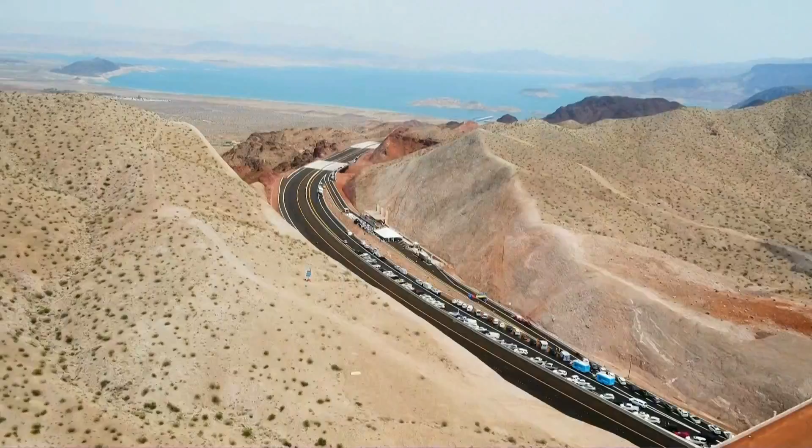This concludes the General Manager's report. Comments or questions for Dr. Fred?

Commissioner? We can't let him off the spot. I know, we got him here. That was an awesome opening. I've never really been to one like that, other than the bridge, how many years back. So I want to just thank the staff for what you put together.

I also think it's time to publicly note that unfortunately we had a couple of accidents right after the opening, but it had nothing to do with the design. I think that's important to put on the record. Do you mind doing something like that?

Sure. There were a couple of accidents, nothing to do with the project itself. One was attributed to a drunk driver. The other was somebody who just decided to do a U-turn. We don't know the cause of that, but nothing to do with the design. We've been addressing this with the media, and we'll continue to monitor the facility in case we need to do something else.

All right, item 4 is to receive NDOT's Director's Report. Mr. Rudy Malfabon has this item. Thank you, Fred.

Wanted to mention related to the I-11, a great event, and I was really pleased to participate in and attend. But we are working with the RTC and Boulder City on some revisions to the signage there. We've received comments, and you probably have too, about people not being aware. It's a brand new highway, so they're not familiar with it, but it will improve some of the signage for if you're leaving Vegas and going to Kingman, a larger sign there that denotes Kingman, but also for Boulder City. Historic Boulder City will be denoted, and the access to the dam for the visitor center down there. So we'll make those signing improvements with RTC, and hopefully people will have clearer direction on some of the exits.

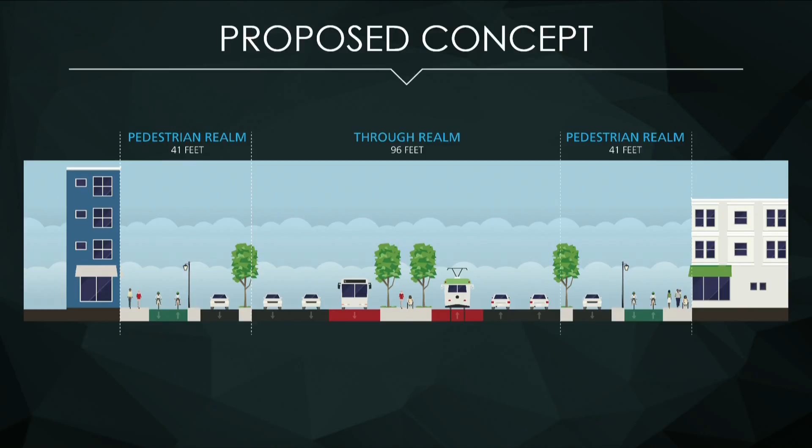So what we did is come up with this segment design. We have a pedestrian realm that's going to be used for pedestrians, bikes, and slow-moving traffic. Through the through realm, we have a corridor that can accommodate any high-capacity transit, which could be BRT, light rail, or a streetcar, along with fast-moving vehicles.

In future, it's going to be quite cool. This is how it's going to look. What you see here is two-way bike lanes. We have reduced the pedestrian crossing distances, enhancing safety. And we have accommodated open space that can be used for parks, linear parks. That was something the community also would like to see.

Like I said earlier, none of this was possible without extensive stakeholder and community engagement. And so I would like Jacob Snow to talk about our efforts on that aspect.

Good morning, Mr. Chairman, members of the Commission. For the record, Jacob Snow with the J. Barrett Company, a subconsultant to Atkins on this project. What you're seeing in the background is the RTC's community engagement bus, or the onboard bus. Most of you have actually been on board that vehicle. It's a converted 40-foot transit bus that inside has a kids' play area and iPads where people can come on and take a survey.

The RTC utilized that bus very effectively up and down this corridor for dozens of community engagement events at senior centers, community centers, recreation centers, employment fairs, and actual bus stops. We got actual boots on the ground out with people who live and work in this corridor. We obtained more than 1,700 surveys from people who weighed in on what they thought Boulder Highway should look like and what the priorities for the design should be.

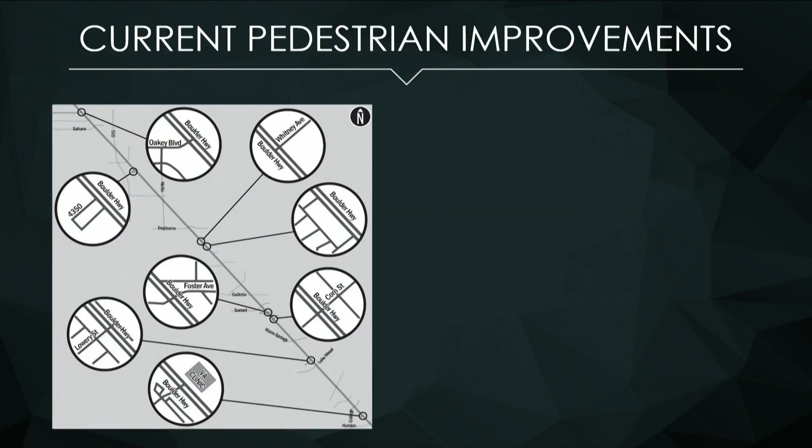Before we wrap up, while this corridor study has been underway, we want to acknowledge and draw attention to a set of 8 pedestrian safety projects that Nevada DOT has already initiated along Boulder Highway. They're our partner in this study and have been active throughout the process. These projects include a variety of safety countermeasures at some priority locations along the corridor.

So, with that final note, that concludes the update, and we're ready to respond to any questions you may have. Comments or questions from the board?

Mayor: Just very briefly, thank you. This has been such a long time coming. It was the main highway for us all back in the 60s, so we know nothing's been done and it's so necessary. I know this is a ridiculous question, but I have two of them.

The first one's not so ridiculous. Have you been able to prioritize the segments, starting in the south, the southernmost, all the way up to Charleston or wherever the last segment is? Have you prioritized this at all? That's one. And in this day and age, a projection on what it costs for each segment, so at least we can get our arms around the magnitude of what we're going to have to bond and or raise.

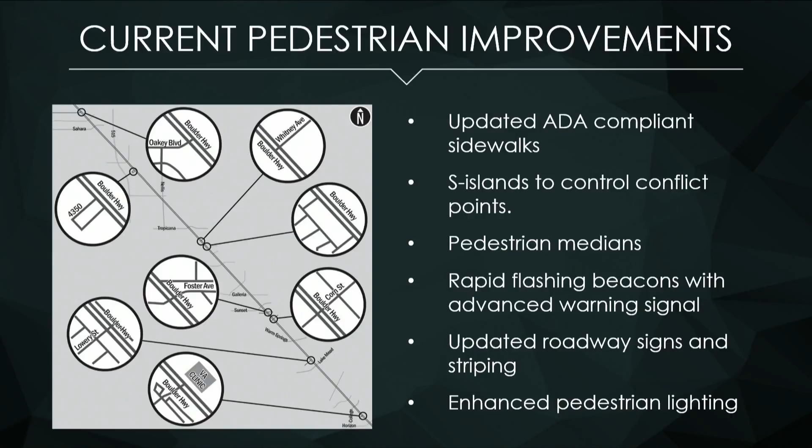With a timeline, do we have an estimate so that the public can know when it's going to start and hopefully be done by? Those are under construction. That contract's been awarded a couple months ago, so I think they're probably through mobilizing, and I could get you the timeline, but it should be probably within a year that they'll be completed.

Excellent, thank you. To follow up on the mayor, is that one project contract for all of them? Correct. That's one contract that's been awarded for those 8 intersections.

Commissioner? Thank you for asking that, it's very much needed. Sun Valley was completed, so that's not even on here as far as one of your identified areas, and that's in Commissioner Gibson's area.

So I think with your presentation, this incorporates those, so they're not exclusive of each other, right? So we're not redoing something down the road. I think that's very key for people to understand, that we're not putting something in and tearing it back out and then putting it back in again in a completely different way.

It anticipated this. Portions of this is my district, portions are Gibson's, so it's a marriage between the city of Las Vegas all the way up to Henderson. I travel that road daily, and it's always been a pedestrian issue for people. It's such a wide area to get across, and even though I have more apartments, more kids, I also have a lot of senior citizens, and we just opened Boulder Pines with the Boys and Girls Club and Mater Academy.

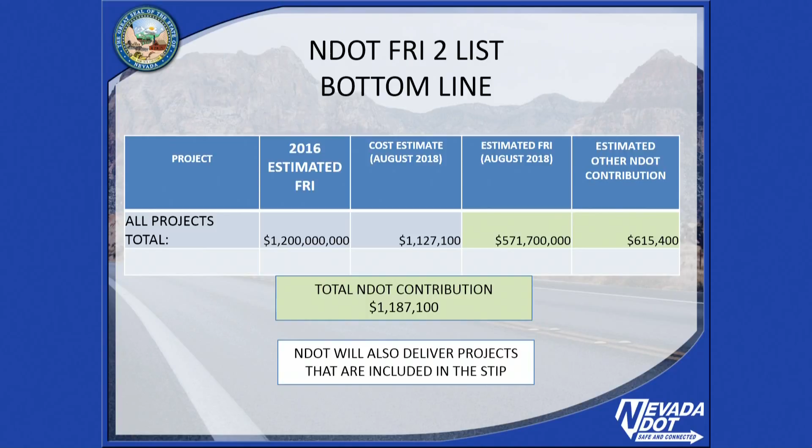Thank you, Rudy. Mayor? Actually, this is for you, Mr. Chairman.

FRI money, those vehicles that are not going to be using fuel - I think this committee or commission or somebody, some group somewhere, needs to get to the legislature, and since you're the boss, I'm asking you to make sure that something is done in this legislature to have those non-fueled vehicles participate in FRI funding. Buses, trucks, cars, everything. I don't know how to go about that and where it should be, but you've been in service a lot longer, even though you're younger. So you're charged with it, please.

Duly noted. I don't know if this was discussed in Carson City two years ago, but it certainly has been discussed with TRAC and some other issues. Do we have any update on that? That's correct. In the last legislative session, there was a discussion to impose a fee on vehicle registration or a separate fee for electric vehicles, but that didn't go through. So it's possible that will be pursued this session. But yes, duly noted, we'll make sure we work with whoever we can to move that forward this session.

Excuse me, Mr. Chairman, really, it can't just be a discussion because this legislature, unlike other states, does not meet every year.

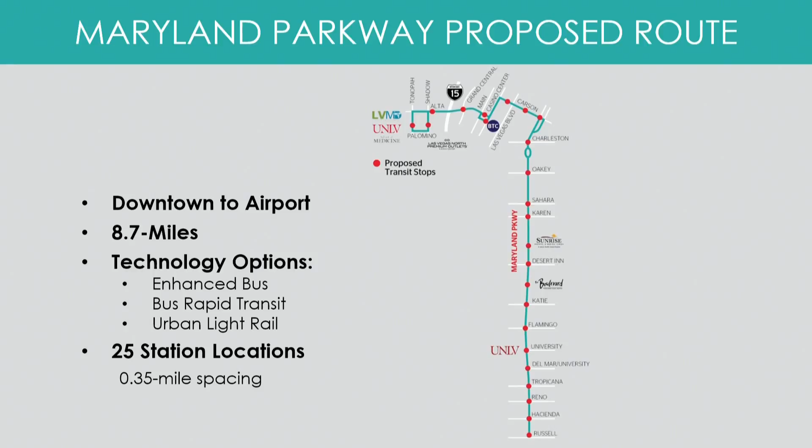So the options being considered: we call it enhanced bus, or in this case Route 109, which is our current bus route's name for Maryland Parkway, bus rapid transit, and urban light rail. I'll just highlight for you what these represent.

When we talk about enhanced bus, we're looking at reducing the number of stops, spacing them a little further apart, similar to what we've done on other corridors, and we've seen success with that on Sahara Avenue, Flamingo Road, and Boulder Highway. Counterintuitively, you'd think taking out stops would reduce ridership, but it actually increases ridership because the service is a little faster.

We were looking to do the same thing on Maryland Parkway, also upgrading the passenger shelters. This is a depiction of one that we used on Flamingo Road; we would look to do a similar upgrade with the enhanced bus option. The point of the enhanced bus is to really optimize as much as possible the current bus service we have, but with minimal capital investment going forward.

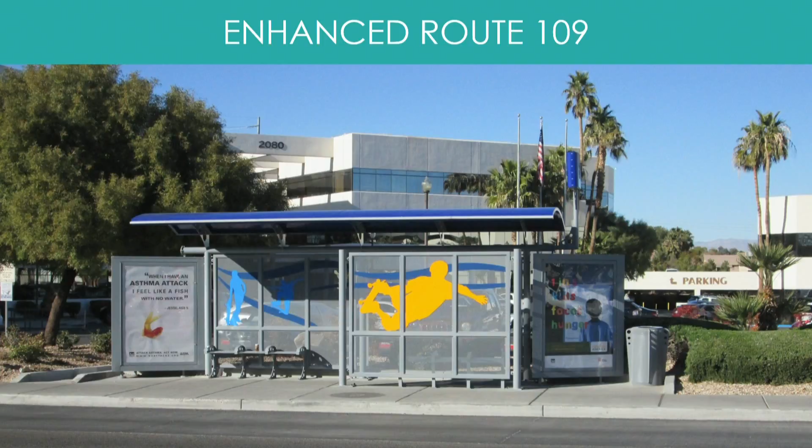The second option being considered is what we call bus rapid transit, similar to what we've done on Boulder Highway and Sahara Avenue. We're proposing to reconstruct Maryland Parkway from the 6 general purpose traffic lanes that are there today to 4 general purpose traffic lanes, plus 2 curbside running dedicated transit lanes.

These transit lanes are still available for motorists to make right turns, thereby preserving the traffic capacity that exists today. At major intersections, we may add right turn lanes to help keep the service going and maintain the capacity of the corridor.

Another feature I'd like to point out is pulling bicycles out of the roadway and creating separated bicycle lanes behind the curbs, adjacent to the sidewalk at the same elevation, giving bicyclists an area that they perceive might be safer and more comfortable to ride on. This also helps create more of a buffer between people walking on the sidewalk and where cars and buses are traveling in the roadway.

This would require slivers of right-of-way. The current right-of-way is about 100 feet nominally along the corridor. What's shown here would require somewhere around 102 to 104 feet, so just slivers along the corridor, except where we have stops, where we'd need a larger envelope to move the passenger shelters a little further away from the curb, helping customers feel more comfortable while waiting.

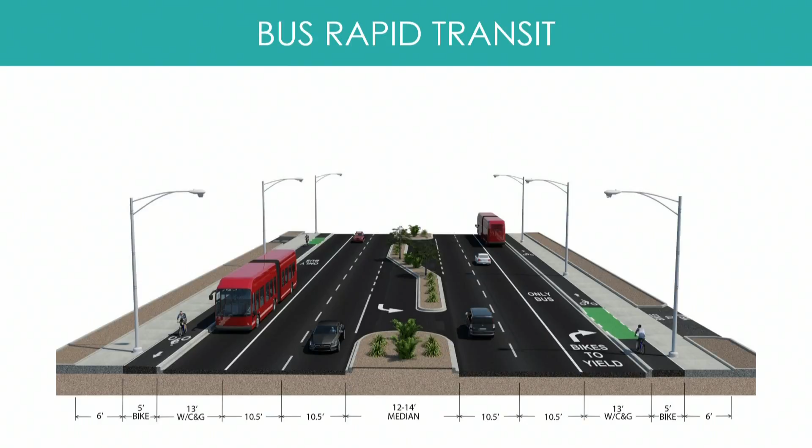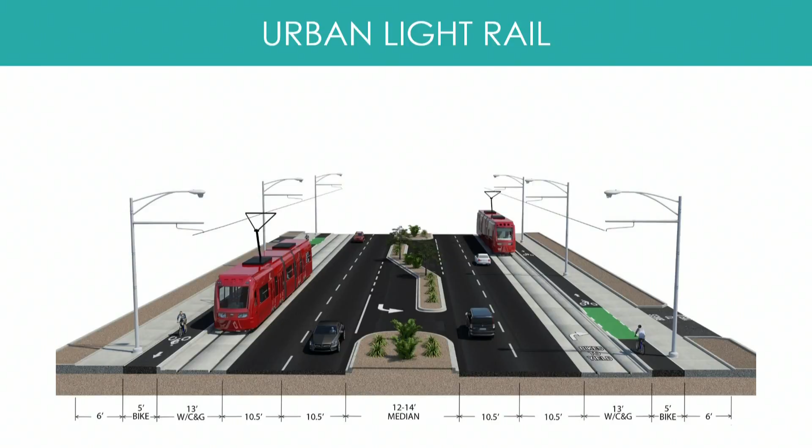This also includes channelizing the median islands, since today Maryland Parkway has a 2-way left turn lane almost the whole length of the corridor; here we're trying to focus the left turns at key access points. The third option being considered is what we call urban light rail, otherwise known as modern streetcar. This is a single unit light rail train, and similar to the bus rapid transit concept, it has dedicated transit lanes running along the curbs.

These lanes, again, are available for cars to use to make right turns. We also are locating the bike lanes behind the curbs, adjacent to the sidewalks, with that buffer between where the roadway is and the bike lane.

I also like to point out that we are showing the overhead catenary system. This is typical on modern streetcar systems today. I am happy to report that these systems are moving toward more limited sections of overhead, or even battery-powered light rail trains.

We've seen this in other cities, such as Detroit, where about 60% of their streetcar line goes off-wire, with no overhead wire. We're watching this technology to see how it evolves, and that may be considered in the future.

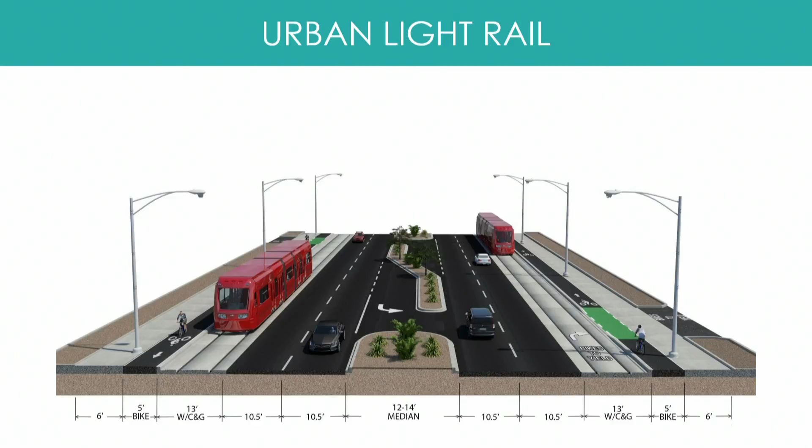This is another concept that shows what it would look like without the overhead. I do have to point out the overhead, though, for the environmental process, because that is the largest potential visual impact. But again, we're going to keep our eyes on the technology to see how it evolves.

So these are the three options that we will be bringing to you for your consideration. When we look at these options, I think the most important part is hearing from the community what they would like to see on the corridor, and that's why we're going out.

We've given a number of presentations to local jurisdictions, including all the cities in the county. We've also gone to the RTC advisory committees, and corridor stakeholder groups such as the Maryland Parkway Coalition, Downtown Las Vegas Alliance, and others. We're continuing to foster those relationships to make sure the community is engaged and understands what's being proposed, and to get their candid feedback.

Going forward, we're looking to publish the environmental assessment for public review and comment. We anticipate this happening in October, then being able to collect the comments and our responses, and bring a summary to you at a later board meeting, likely in November of this year, for your consideration as to which option to pursue.

Ultimately, we need what's called a locally preferred alternative to close out the environmental process, and that locally preferred alternative is one of the three selections that I presented to you. So with that, I'd be happy to answer any questions.